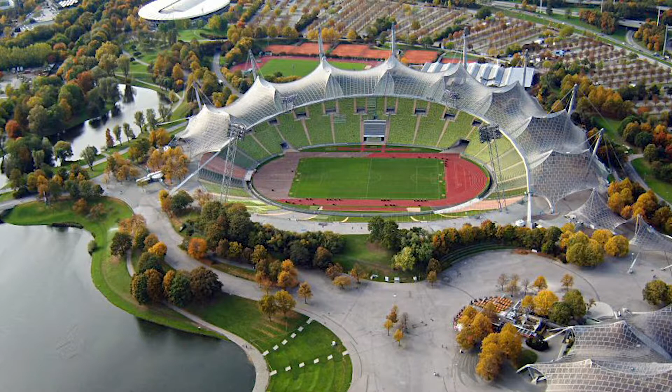So we've chosen specifically today to talk about light and color, which for us are not really two topics, they're one topic. We chose to talk about it because it greatly impacts our work, because it's tied to the natural environment, but also because it's tied to our task as architects. So first we tried to understand what light is about as a general topic, and then also in the context of architecture, and we're also going to talk about some examples of how that came to be through our projects.

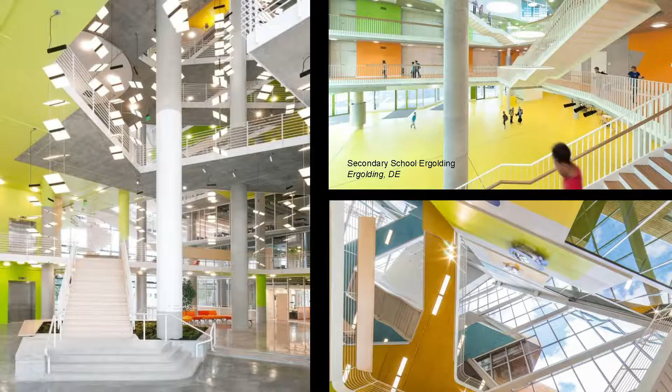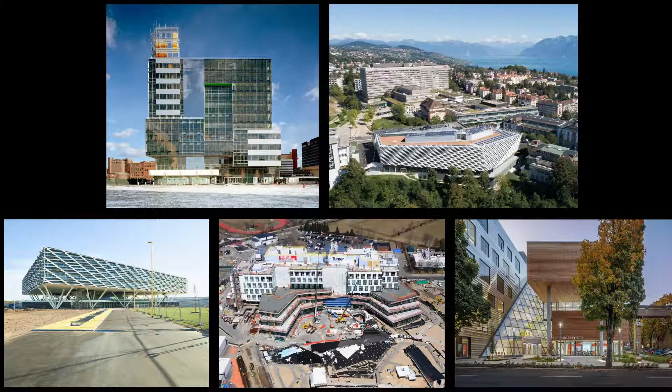So today we're going to talk about 5 projects where we put in a particular effort towards light and color, or using daylight and color in the design of the projects. And what's special, I think, is that they're not just projects where we thought about light and color, but projects where we thought that this process of these 2 topics actually gave the projects their unique qualities.

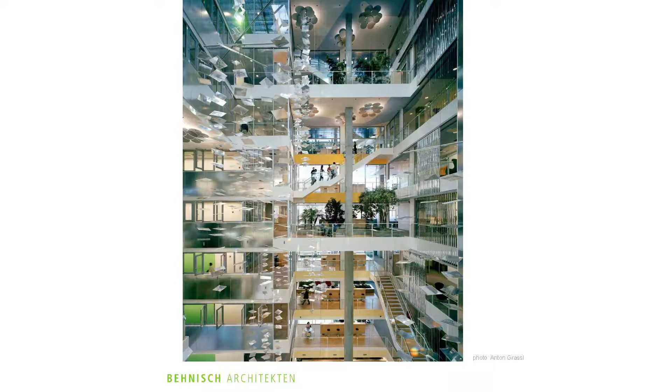So in this project for us, it was really the quality and the experience of daylight that was so important, rather than just the quantitative aspect of calculating the number of hours that we needed artificial light. So when a pharmaceutical company moved in, they actually saw a decrease in the use of sick days by their employees, which we think really has a lot to do with the natural experience of the space.

And because this building is too tall to get direct daylight all the way to the bottom of the building, what was interesting for us was actually having to use mechanical means with these heliostats to bring daylight down to the bottom of the building. And then through these prism chandeliers as well as these reflective slats, they created a movement of the daylight. So we actually had to mechanically create the natural feeling of daylight, as if the daylight moves as it does outdoors. Out of something that actually was natural daylight, we had to make it feel natural again by the time it got to the bottom of the building.

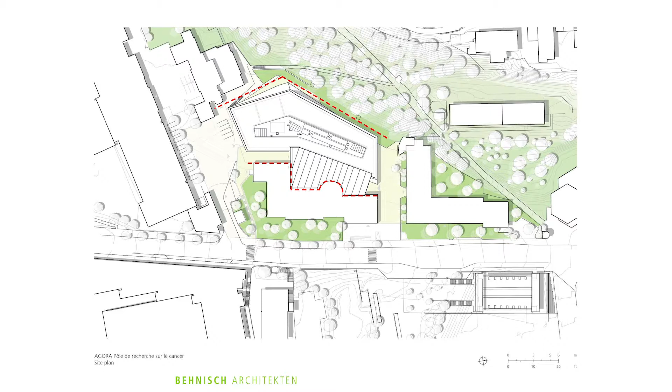As I mentioned before, where the building is sited is almost ideal in terms of view access to the landscape. You can see the hillside there, but there are some difficulties as well. We're very close, so that red dashed line is the edge of the site where we can't build any further. The other red dashed line is up against the building, since we're quite close to an existing building that houses the other part of the Cancer Research Center. Those two constraints were difficult to work with.

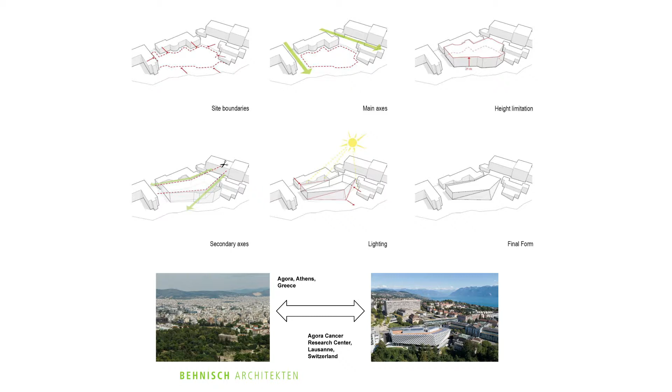So the site boundaries were pretty awkward programmatically and urbanistically. The height constraints of the building were tightly controlled by the city because everyone wants a view out to the landscape and we don't want to block that view. We also had a lot of program to pack into this very small site with dense laboratory space. So we created some space between our building and the existing building to get daylight into this new construction. And up against the edge where we had to meet the hilly site edge, we started to push and pull the form in ways that responded to the mountainous terrain but also allowed for more daylight, especially in the back where we tilted the building to bring daylight between the two buildings.

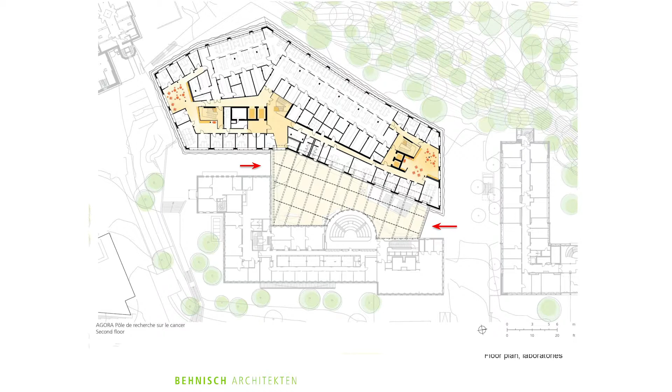Here you can see the dense layout of the laboratories in the upper floors. We wanted to provide extra space for interaction for the employees in both facilities for research. So we decided to put an atrium between the two buildings that would allow for a much taller entry sequence and entry space with a lot more daylight as you enter the building. You actually enter the building through this atrium.

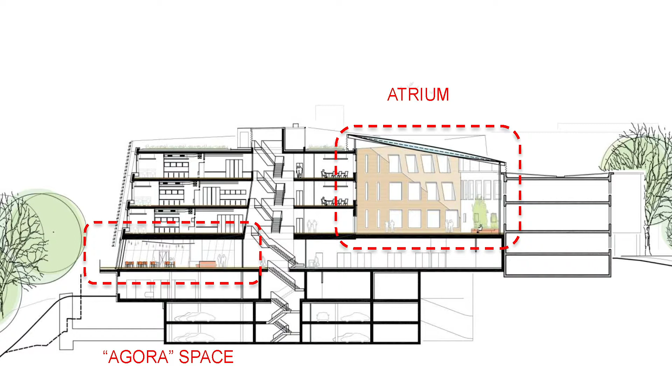So what makes this a special indoor space for us is the quality of always having the natural color of the outdoor daylight mixing in with the artificial lighting inside. So as the color of the sky changes throughout the day, you have this sort of outdoor feeling in the event space, which can also be lit with regular artificial lighting.

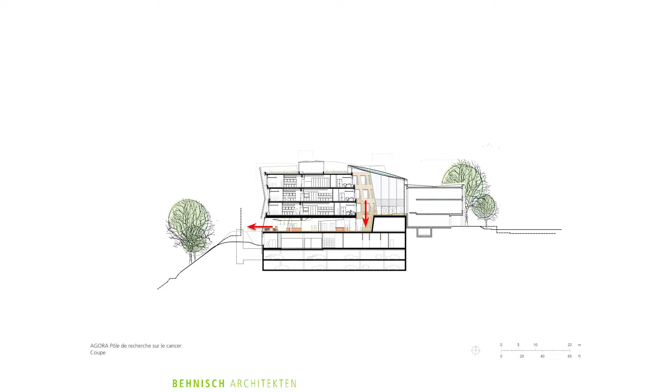So as I mentioned before, you enter through this light-filled atrium, and then you actually descend down one level below street level, and then you descend down towards the landscape, having your view out towards the city and towards the trees. 그래서 이 가운데 공간으로 들어와서 아고라, 한 층 밑에 있는 아고라로 들어가게 됩니다.

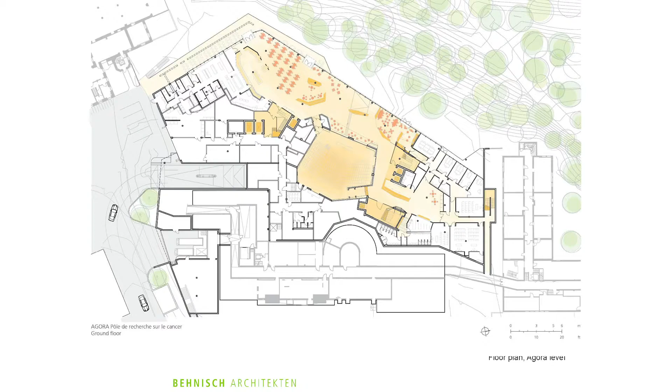So while the client had requested a lot of meeting rooms and much smaller spaces, we wanted to keep this agora public space that was connected to that atrium as open as possible because we wanted to maximize the interaction of the landscape and the site with the users inside.

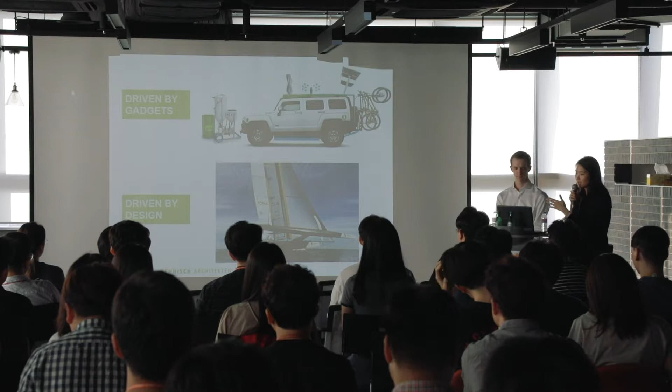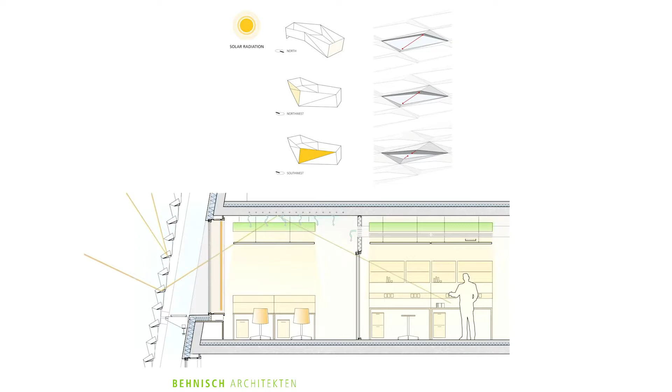So this facade is actually meant to be more like the sailboat, right? None of these elements on the facade move. None of them consume energy outside of what's needed to actually produce them. But they actually amplify the performance of the daylight as it enters the building. So we initially actually sought a completely glass facade, but there's really strict energy standards in Switzerland, so that eventually led us to develop a punched facade - we had to punch openings through these surfaces in order to get a really high insulated value.

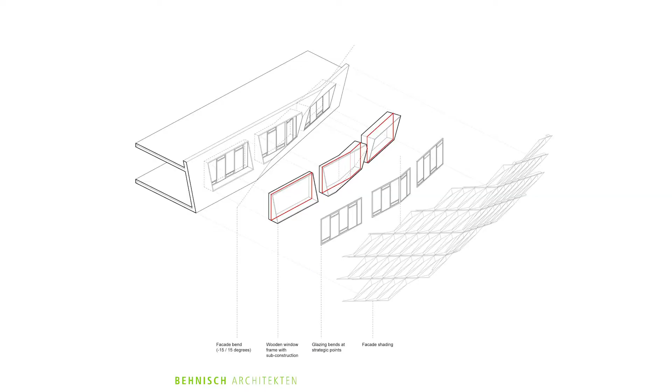So the other principle of the screen facade is to reduce contrast, aside from just blocking solar heat gain. So we can actually increase the visual comfort of the users sitting near the window by decreasing the difference in light level between the window and the space around it. So this is a phenomenon that's well known to photographers.

But one major difficulty with the screen facades is actually controlling the size of the module, because you want to see out of the building and you don't want to damage the view out while you're designing it.

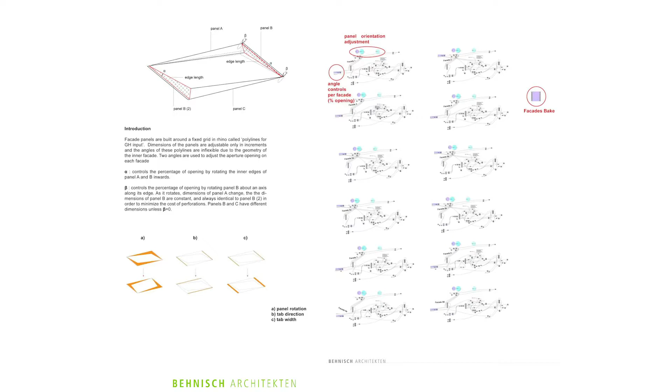So the initial concept was to allow these pieces to close like apertures, like on a camera. But we realized that by just doing that, we would actually start to block the view out of the building, and we might actually start to block the daylight as well. So what we did is we built in some sort of depth and rotation variables into the folds of these surfaces in order to control that more closely and to mitigate those problems.

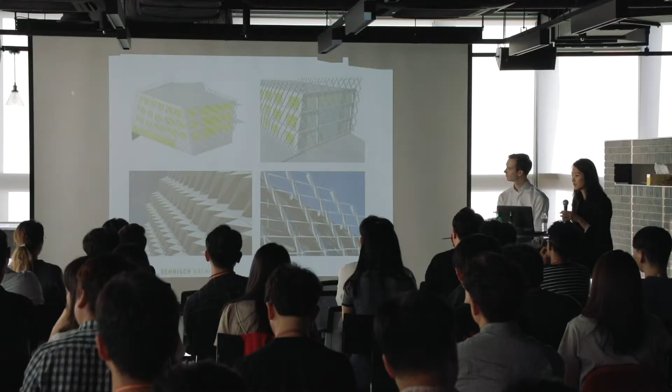So as we work to optimize these facade elements for the various orientations and folds in the surfaces, we also had to work to sort of geometrically optimize them for construction economy so that we wouldn't have an infinite number of very specific custom-made units.

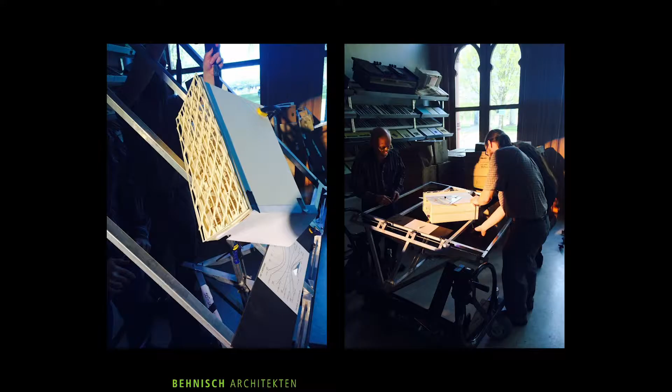So we also built a sectional model of this and had it tested in a laboratory where they test the specific light angles manually. And the main purpose of that is actually just to look in the model and sort of see the qualitative effects in person.

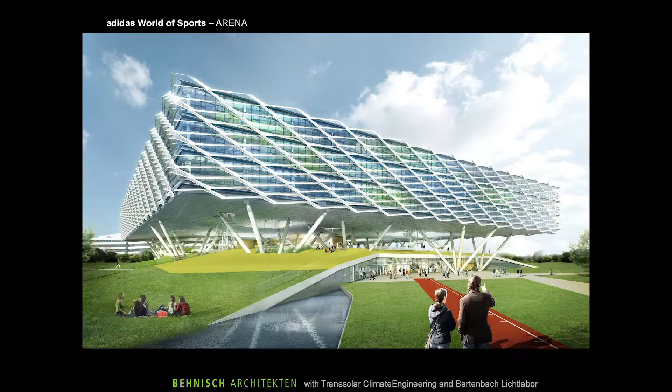So another project for us that we wanted to talk about is for an Adidas headquarters in Germany. So a lot of the research we were doing on the last project was important for this project as well. So they're really relevant to both projects. But these similarities began to diverge because of the client and also because of the site constraints.

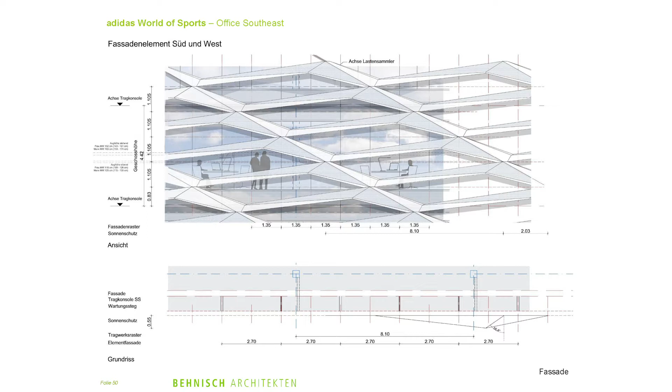So the public space is able to access this ground floor, which is buried inside the landscape, while 2,000 employees will work in the space floating above.

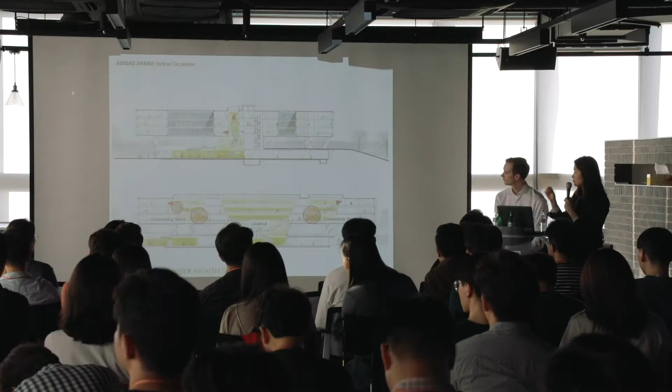And here, one of these light wells is a connective tissue that connects the upper space and the lower space, so you can sort of sense the drama of being in the landscape but seeing this piece floating above you.

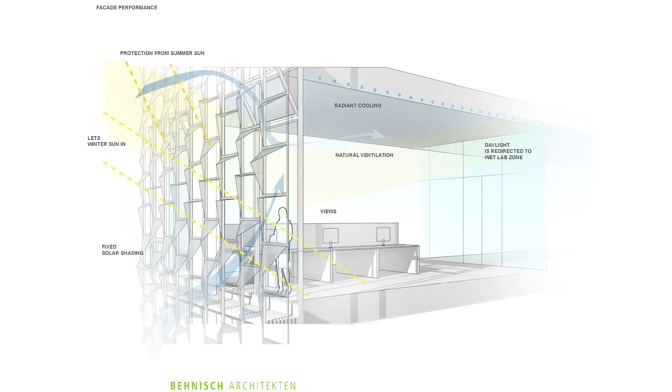So the concept focused on this fixed sun shading screen here, and it was geometrically calibrated to reduce the peak cooling loads for the building by 65%, but also to reflect daylight deep back up into the spaces.

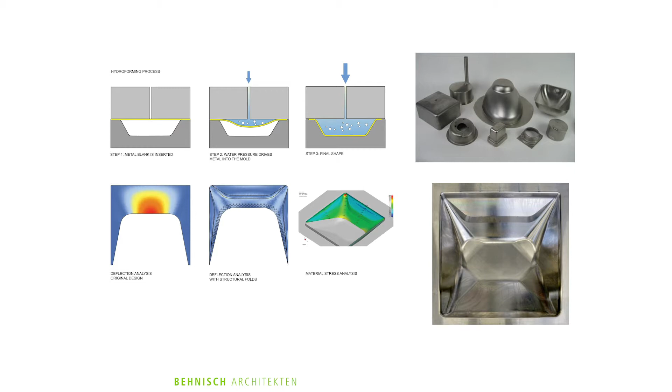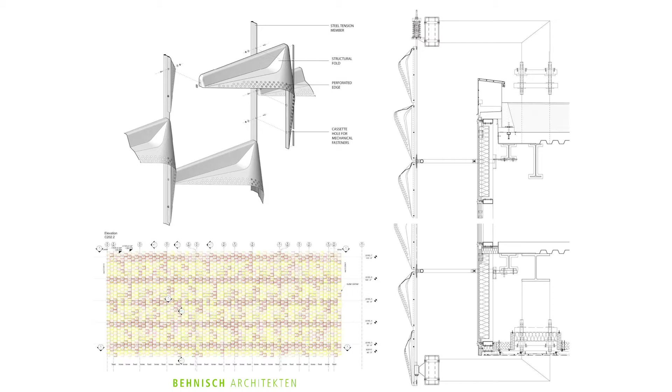So the structural folding of these elements resulted in really thin pieces that were only 1.5 millimeters thick and they only weighed 10 pounds apiece.

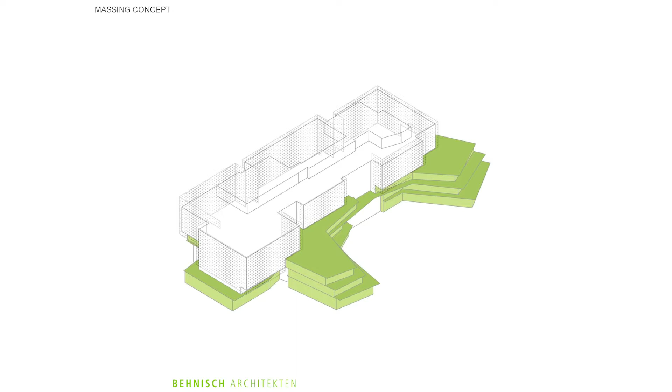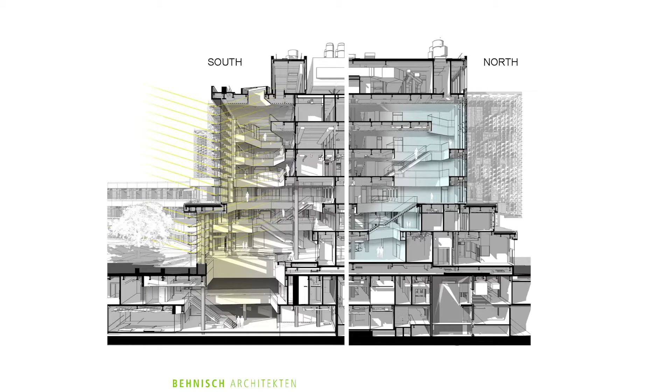So here you can see the atria lit on the north side over here and on the south side. So on the south side we have these deep shading wings that are perforated to filter the light that comes in and bounce it around the atrium, but these deep shading wings also serve as structure for the glass itself.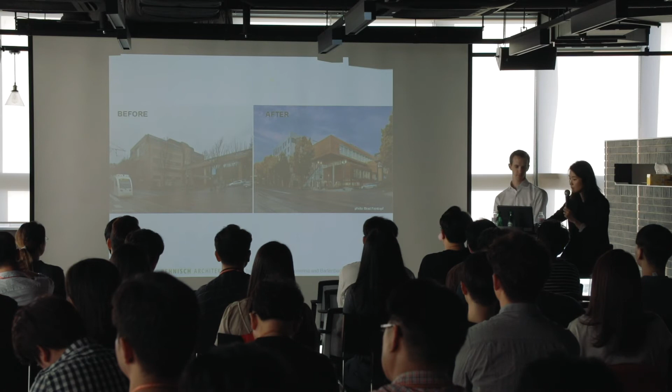So here you can see the original building before, and then you can see the renovated building with our new building attached to it. 여기 이제 비포와 애프터를 보고 계십니다. So the building was intended to create an urban connection between the old building, between the streets on the north and south on these two sides, which were at different heights, and also between these stacked boxes you see with the green roofs there, which contain the classrooms.

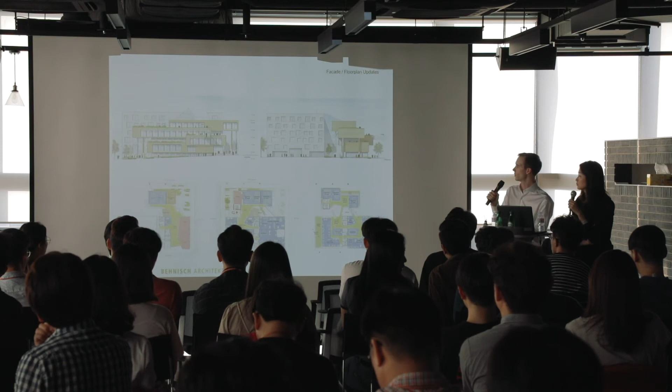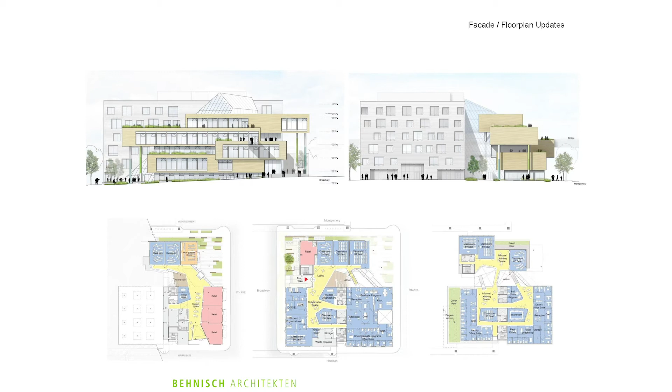So here you can see the three parts, right? You can see the reclad renovation building here on the left. On the right, you can see the stacked classroom boxes. And then, importantly, you see this glass atrium between the two, which highlights the connective tissue and connective pathways between

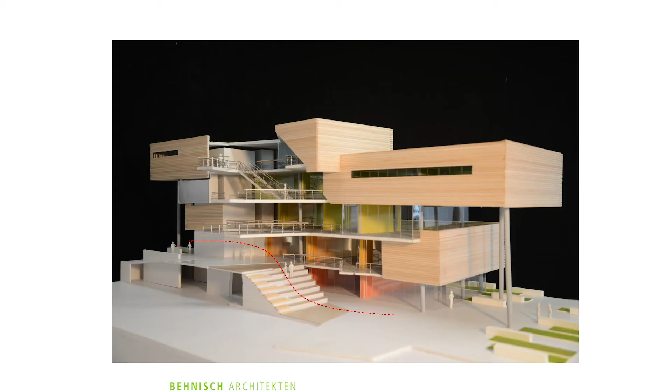So this is the grand stair social space which we use to create this urban connection between the two different street heights.

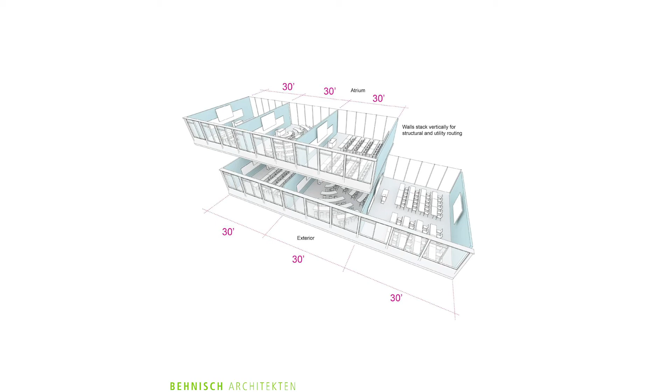And this will also allow light into the atrium because both sides of the classroom have glass walls, and only the front and back are solid. So daylight can come all the way through the classrooms into the glass atrium.

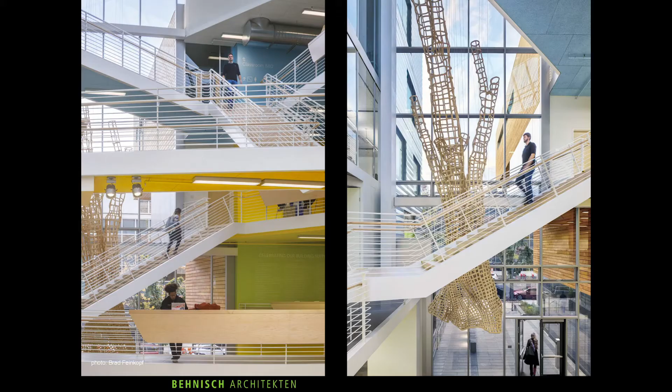So the mix of circulation and workspace creates opportunities for these sort of chance encounters between other students or maybe with a professor. And it's also great opportunities, we thought, for interactions with artwork. So the university had asked us to work with a couple of artists to coordinate their work. And this piece required particularly close coordination with the artist.

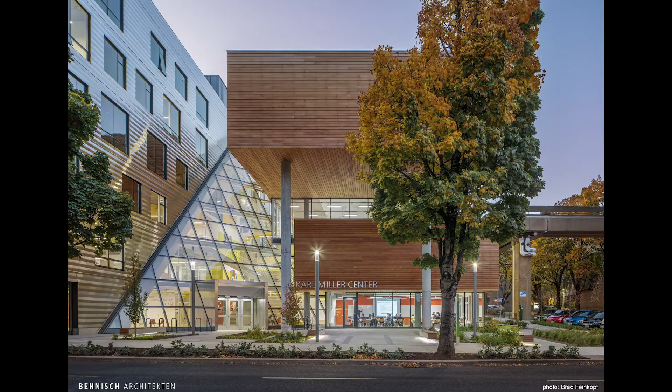So finally, you can see the existing building reclad on the left side. And you can see how it reflects the colors of the street, the sky, and the landscape around.

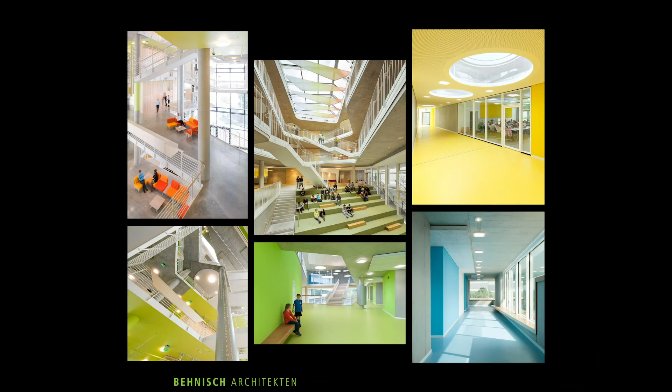So what we hope that we've shown today is that daylight and color are not just criteria that you have to address when you're designing a building, but that by thinking about daylight and color, you can actually enrich the possibilities of architecture. And furthermore, you can actually use them as driving forces in design to give the unique character to a building that it needs.